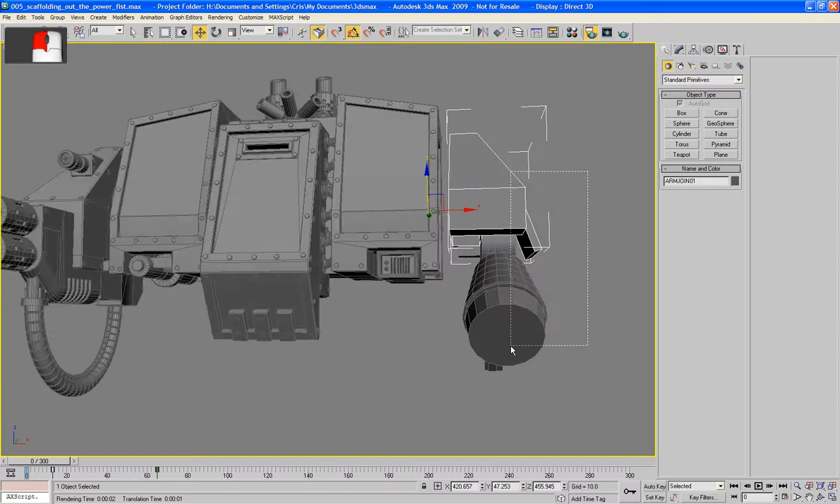So we built the simple kind of skeleton we needed for this. We've gone and I've drawn out the logistical steps we're going to need and the parts we're going to need to make it actually work.

So what I'm going to do is isolate this off now, make it its own layer. I'm going to call this the power fist arm. Put L so we know which one it is. Okay, and we'll hide everything else that isn't this power fist arm. I need to move these things into it. There, now just the power fist arm is visible, which will make things a little bit easier for us.

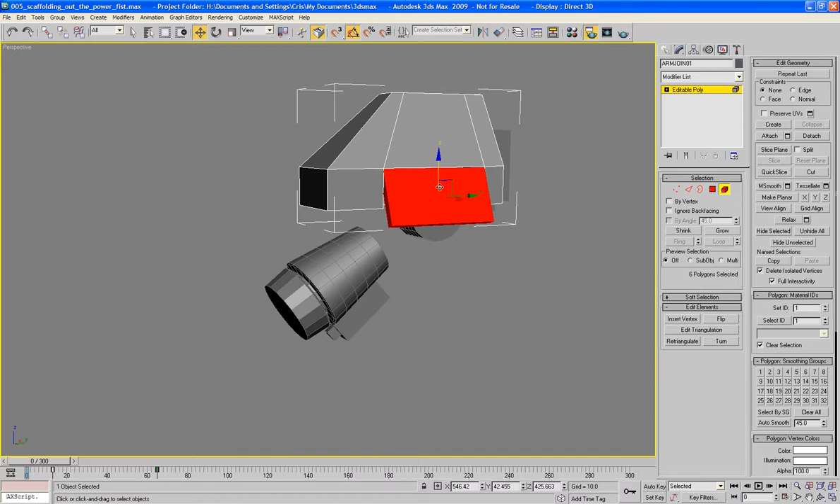Okay, first things first, let's look at this. I'm going to strip out this piece, and I've got this piece here that I can start working on as a base. Okay, now I'm just going to get out my sketching. And remember, my sketching was very rough.

What I need to do first is start building the very simple shapes that I'm going to use for this. And the thing I like about this is that I've actually got quite a good design, I think, for my main actual kind of pivot area.

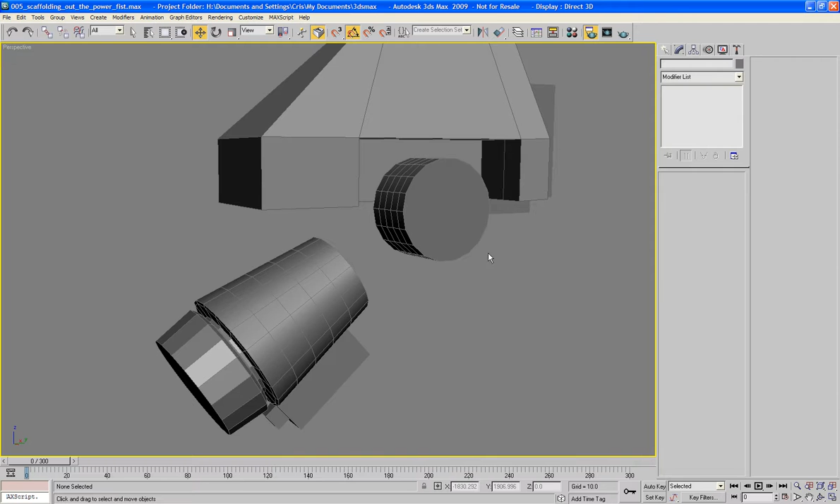So what I'm going to do is obviously ignore this cylinder because it's only been designed simply as a piece of scaffolding, and I'm going to make an auto grid, make it 24 sides. I'm just going to pull it out roughly from the middle of this, give it minimal height.

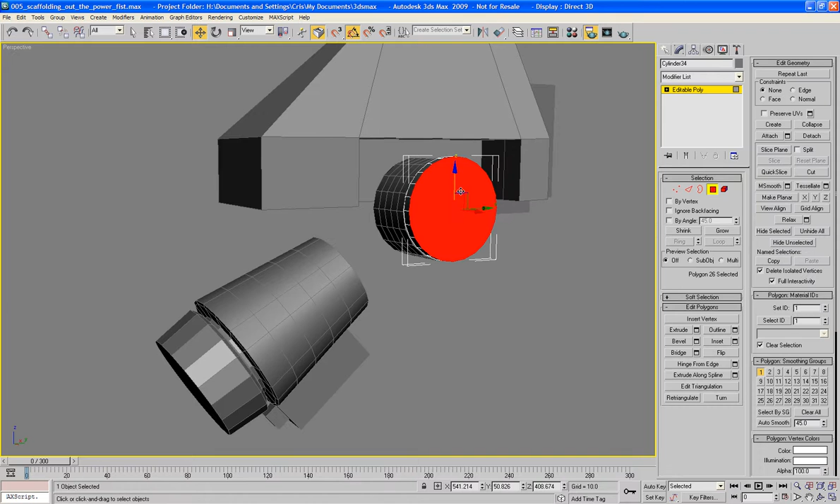There we go. Convert to editable poly. Now I like working just with the front polygon, so I'll delete the back ones, which is obviously I just selected the front one, did a Control and I, as you saw up in the top left viewport. And now I can move this kind of back to about here. That's roughly where I want it. And this gives me a shape to work on.

Now I'm just kind of looking over the shape that I've got here, and I want to start with the middle piece of this. So I'm going to go straight into bevel. Now, freehand beveling, as you know, is lots of fun. You can do lots of things with freehand beveling that you can't really do without taking a lot of time with a lot of sliders otherwise, so it's worth taking your time practicing freehand beveling.

Now I'm going to give it a 0 height. You can tell it's 0 height because it basically does that weird thing around the edges, and bring it all the way in like this to about here. This is where I'm going to start the actual inside piston mount for this. Now what I need to do is just bring this out just a tiny bit, just to create that little chamfered area there.

I'm going to bring this up, like so. A bit more. Because we need enough space to have the pistons come off the top of this as well.

Now I'm going to build the inside part of this. There we go, bring that to about there. And this will give it basically a kind of impression of heavy weight to it. Lots of nice, thick, detailed parts like this.

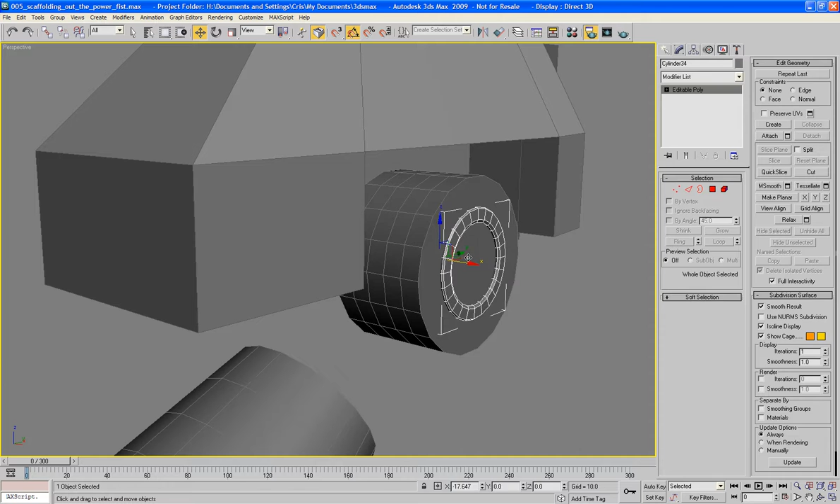Okay, that's fine. Now what I'm going to do is delete this ring here. I can just hit the delete key for that. And I'm just going to mount this into here, like so for the moment. Get rid of my scaffold. And this will allow me now to do some work on this piece.

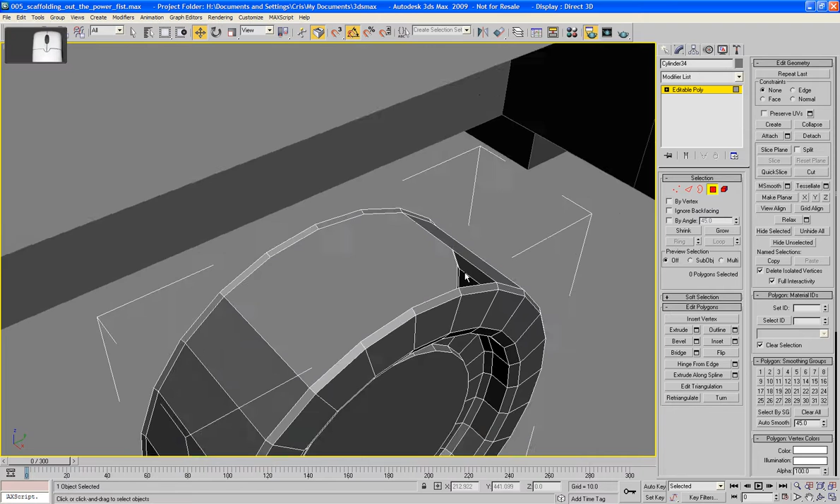What I'm going to do here, because I can cut this in half later on, I only need to do the top half at the moment. I'm going to select these 4, just here, and I'm going to delete them. Next I'm going to grab here to here, and do a bridge. And then it's just a case of grabbing here and here, doing a cap.

In fact, I probably don't even need that cap, but I'll come back to that in a moment. It's easier keeping it there for the moment, I think, until I do some changes over this side.

Okay, next I'm going to do a quick inset just here. Just wait for autosave to do its thing. There we go. And I'm going to cut here to here. Just do a quick connect. Okay, now just a case of a quick extrude straight up, like so.

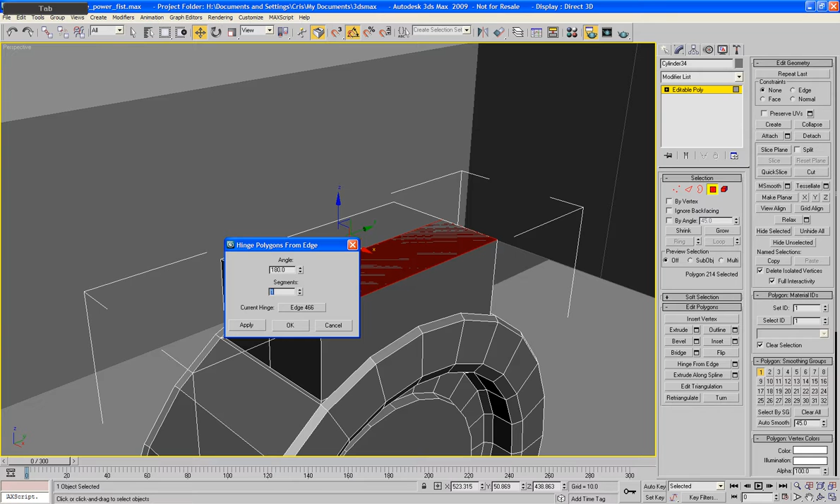And then what I want to do is go to this polygon here and do a hinge edge on this one. Pick hinge, it's going to be this. 180 degrees. And if that's 24 segments, then we're going to have 12 segments here. Click OK, click delete, Control A, go into weld.

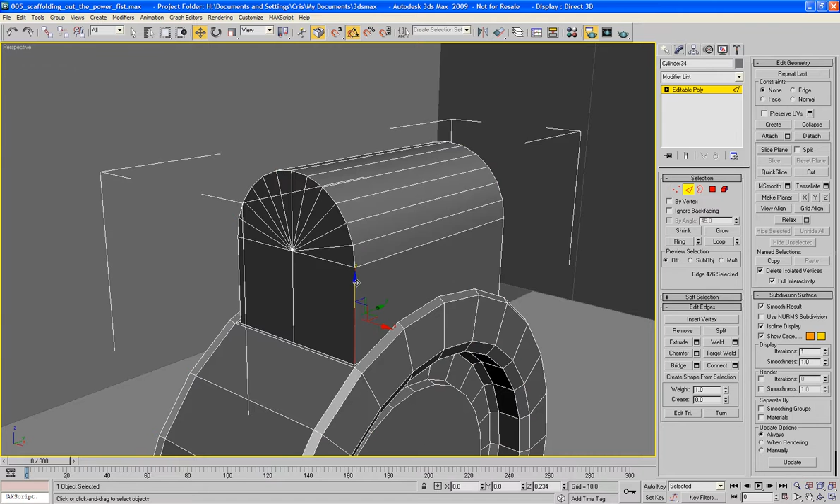Now our settings for weld may be what we had them at earlier, so I'm just going to be careful. They're not. Just make sure this is welded together, and it is, so that's fine. Okay, so we've got this top part coming over and out like that, which is ideal for what I want.

Now, because I quite like most of these shapes and the way they're coming through, I'm just going to have a look and see if there's anything else I can do with this.

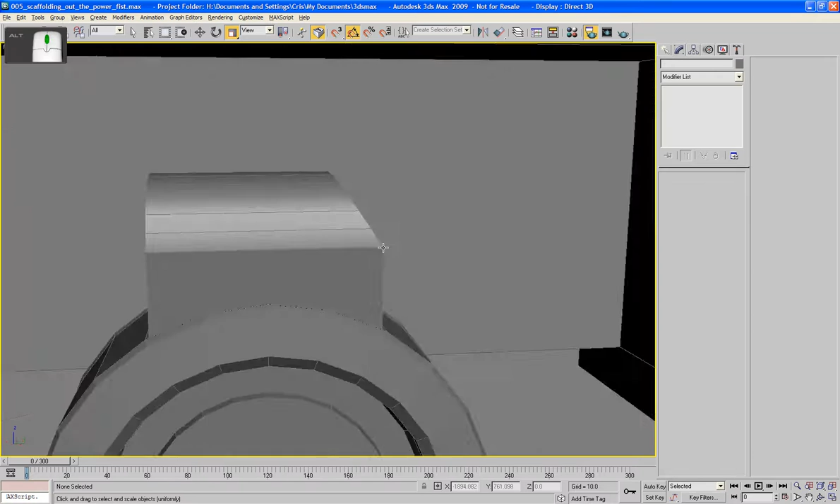And my left viewport here. What I'm going to do is grab these and just turn them over, about this far. That gives us a slightly more interesting shape. Now you may notice they're all crushed up and no use at the moment, so we'll just use the scale tool on them to make them the right size again. There we go. Drop back in perspective. That's nice, and that'll chamfer nicely as well.

Okay, next what I need to do is kind of half this. So I'll just get my select by polygon tool, take half of it out, like so. Then I can just use my rotate tool, hold down... well, I can't hold down shift to do this really, because it'll be back to front if I do, so it's going to have to be a mirror.

Just make sure I've got it on the correct axis, which is the Z. Click OK. Now, of course, I've got to reset the X-form on this straight away, which will turn it inside out. But I can turn it the right way around again just by convert to editable poly, select by element, and then flip.

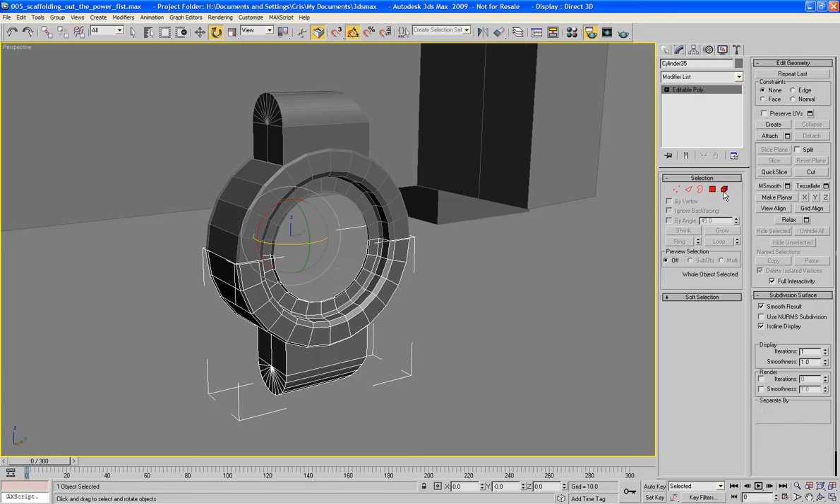Okay, let's attach the two parts together. Quick Control A and a weld. And make sure our verts start getting attached together again properly. There we go. So that's starting to work out okay.

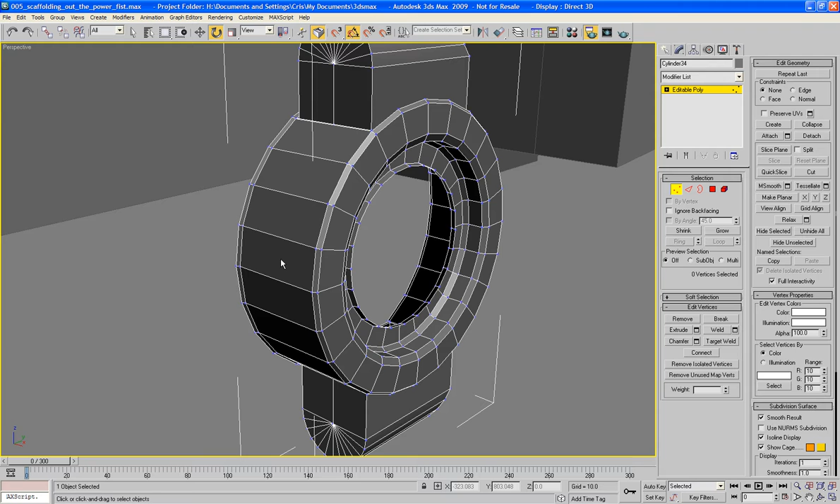Now we need a large central kind of area that we can have our main control piston come off. I mean, these may well be just redundant, but that's not the point, we still need to have the detail there. So what I'm going to do is select these 2 polygons here, and I'm going to delete those.

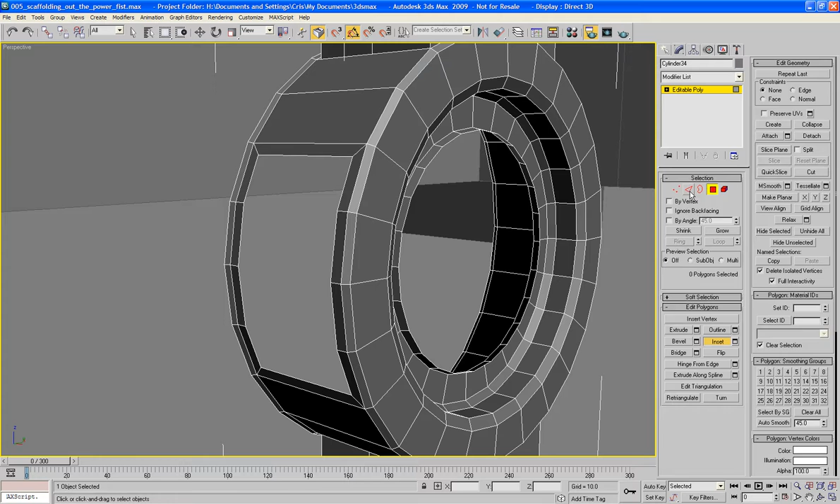Actually, before I do, I'll inset them a little bit. There we go. Now I'll delete them. That way I've got a slightly thicker edge, which makes it look stronger. Then bridge, and I'm going to cap there.

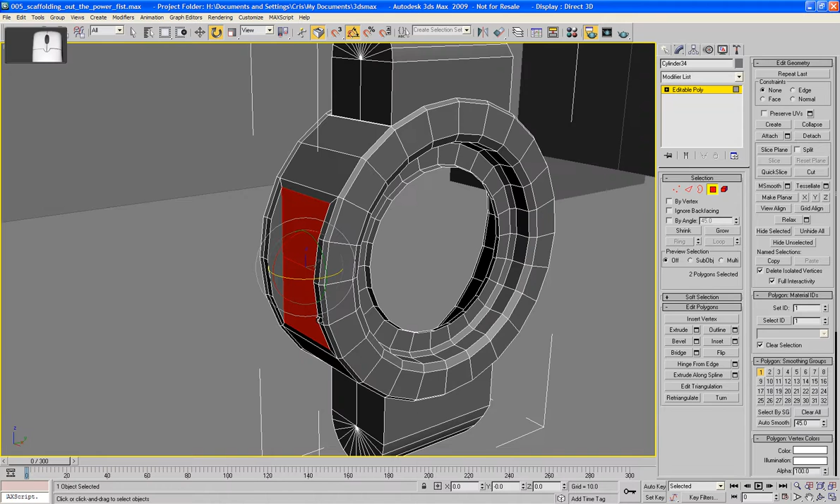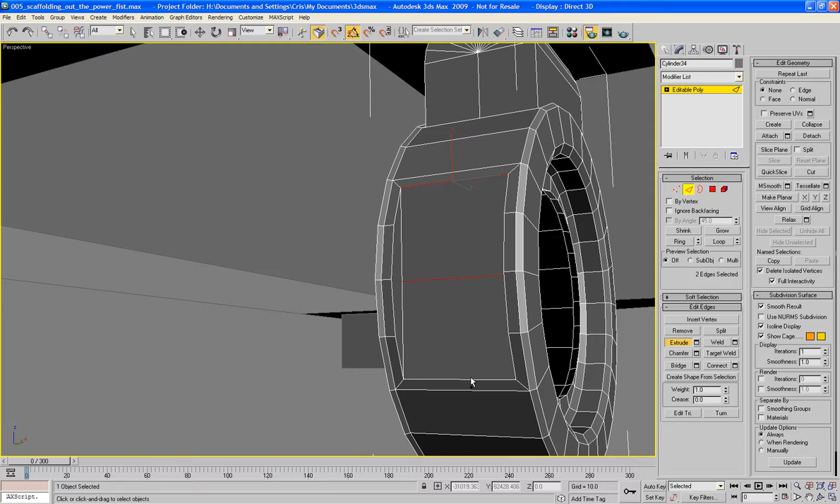And then here to here, quick connect. And then I'm going to just extrude this straight out. Now I don't need it that thick, so that's a little bit too thick for me, but that's okay, I can make it smaller. So I only want half the size. I'll just go straight down and do a connect. And then just extrude it straight out, like so.

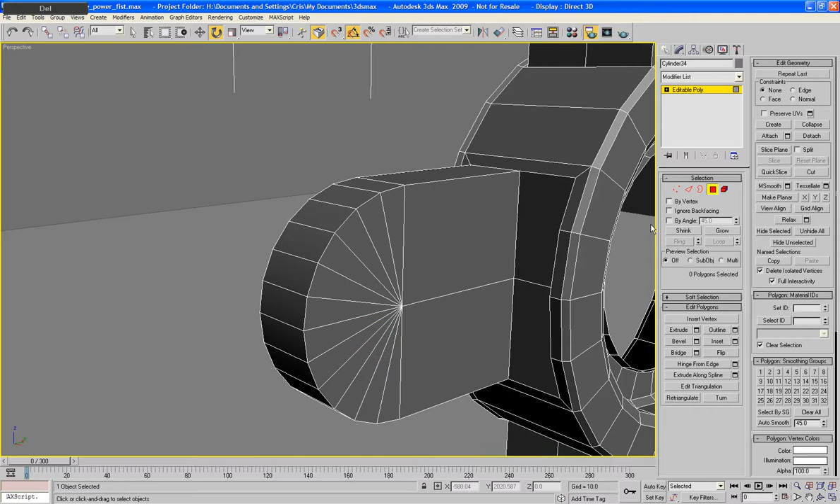Delete this bottom piece, then do a hinge from edge on here. Same settings as before, so I just click OK, delete that piece. Control A, do a quick weld just to close it. Okay, and now we've got a piece that I can basically build our short, fat, stubby piston off straight away. And that gives us a secondary kind of movement off the elbow that we don't need, but which we're having anyway.

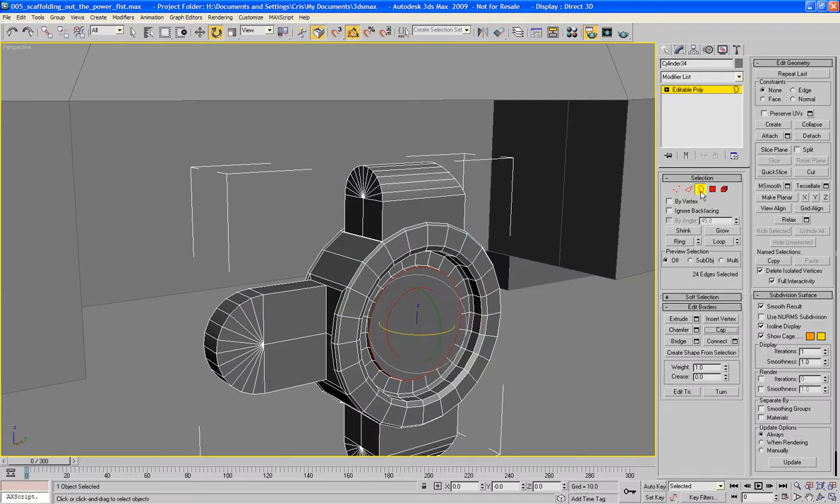Okay, let's cap this middle part again, like so. And I'm just going to isolate this and look at the back here. Now the reason I didn't remove some of these pieces is because I need this round shape for the moment. I'm able to keep it anyway. I'm going to cap that.

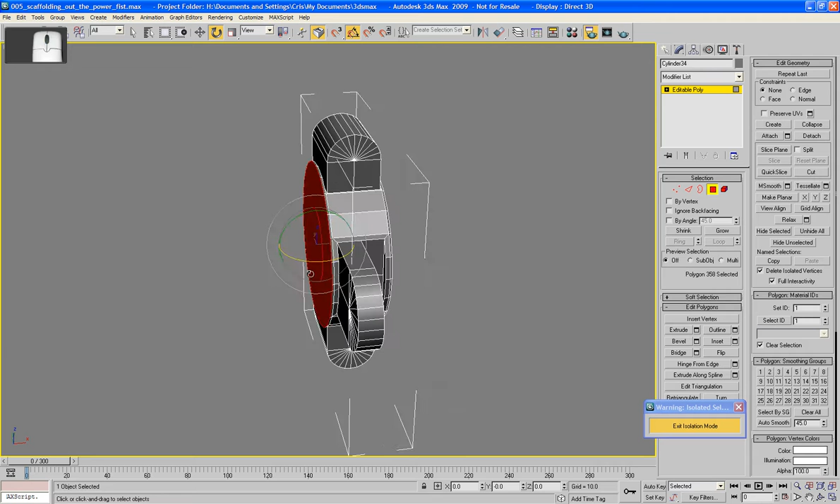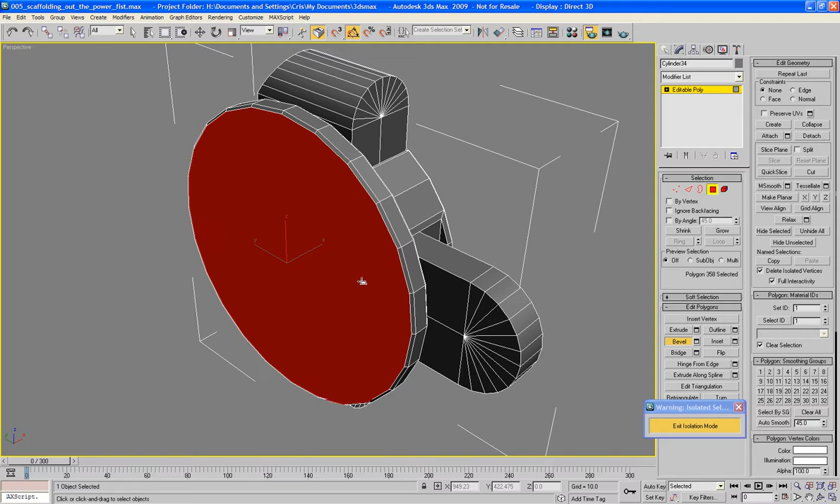And if you remember, I said that we needed to build our larger disc that kind of goes behind this. So what I'm going to do is give it a 0 length bevel, bring it straight out to about there. Then slight chamfer, bring it out like that. Slight inward chamfer, and then into about there. Okay, and this gives us basically this nice big fat control ring, which is like a big gear.

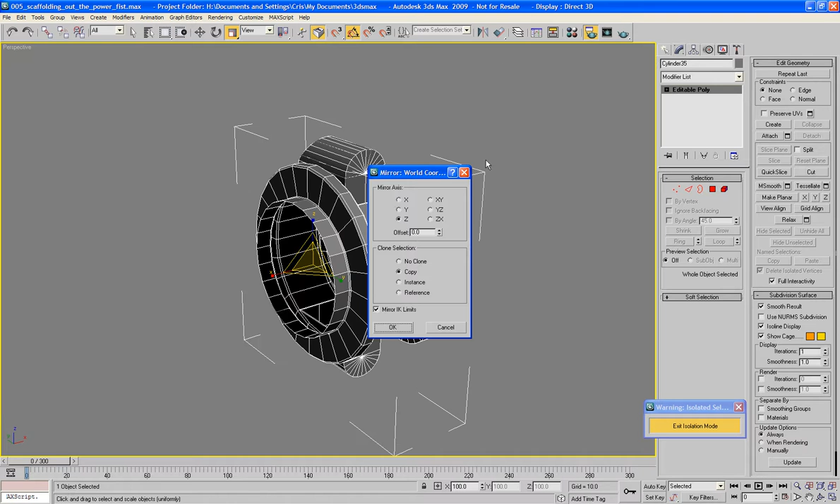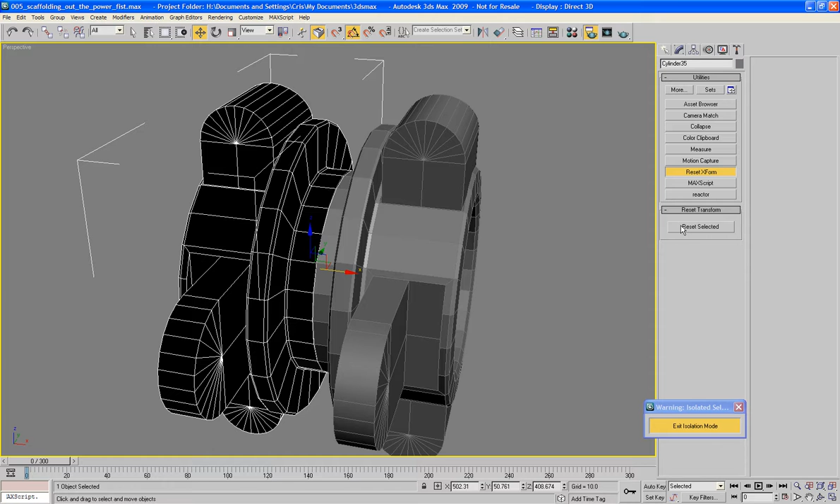Now if I delete this inside part here, what I can do now is create a mirror again, this time on the z-axis, which I'll move across, like so. Funny, you probably hear me kind of leaning forward and leaning back and stuff. Okay, again, same as before, we need to reset the X-form. And then flip that over.

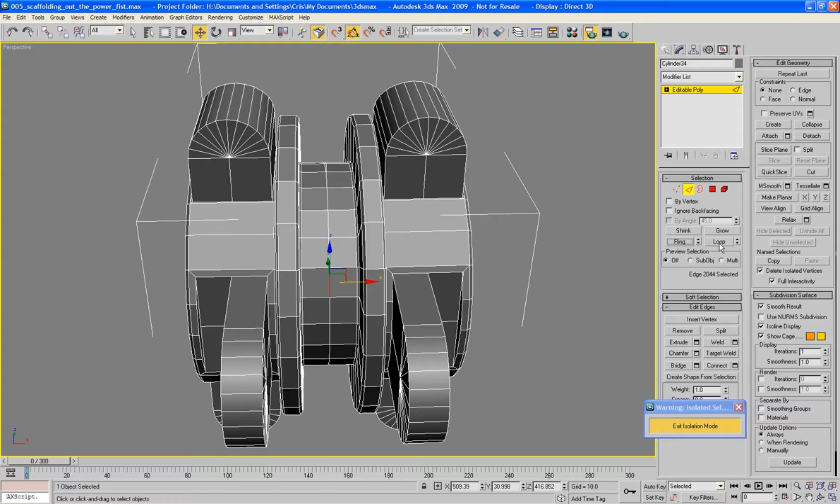There we are. Now it's just a case of attaching the two, then a quick weld. Then if I just grab here and do a quick loop, or ring rather - no, hang on, loop, always get them mixed up. Backspace. Looks like we've got a slight disparity in its shape there. That's okay, you can work with that. Backspace.

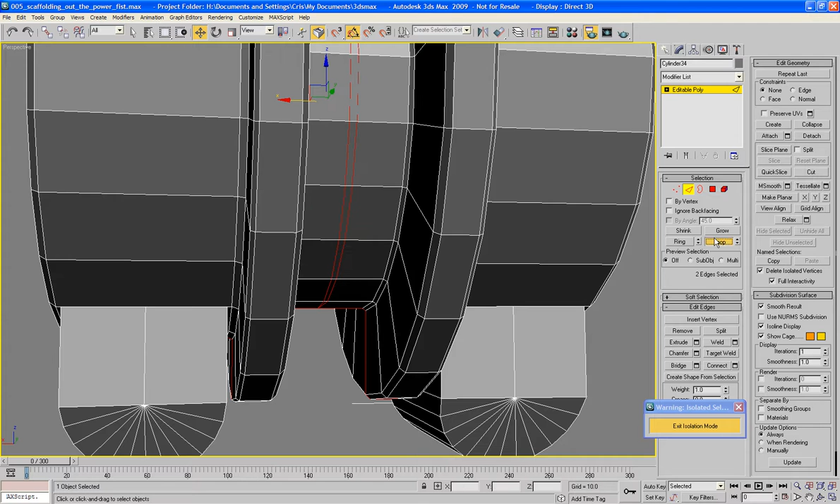Let's just undo this a moment. Go to my top viewport. Looks like the angle is off. Let's flip that again. And the last thing I want is an angle that is off, to be quite honest. So let's make it an angle slightly better. Let's hit F3 so I can see what I'm doing.

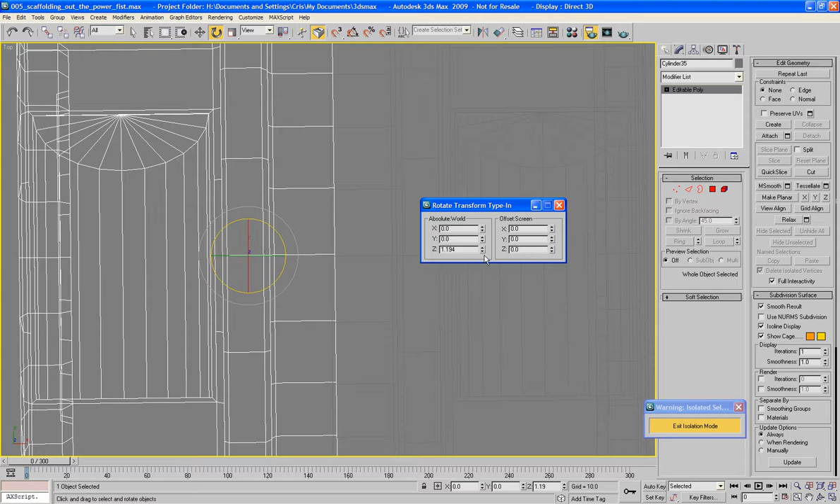This is always one of the problems because, of course, when I created and was building on the grid, it must have been slightly offset. So the angle wasn't completely perfect, but it is something that we can fix, so I wouldn't get too worried.

Okay, I'm just going to use the move tool, move it to about there. That's fine. And then it's a case of attaching them and doing some welding. Now let's see if we can get rid of this middle seam.

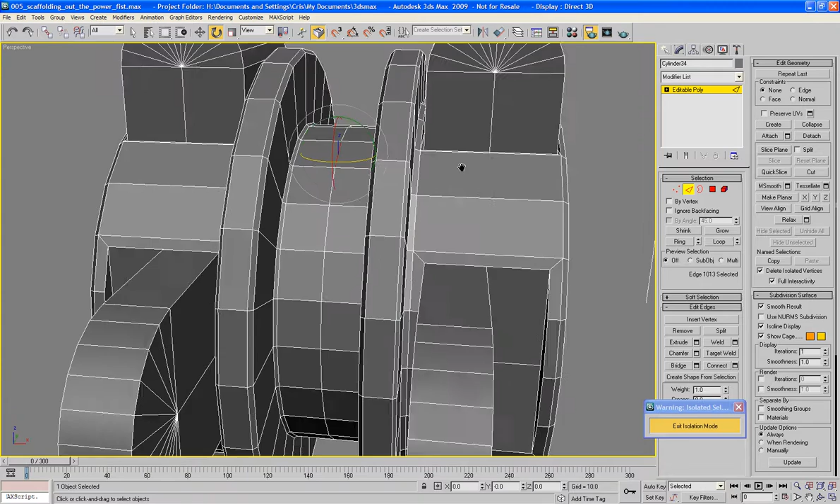Sure, looks that way. Backspace, top view and zoom. There'll be a load of verts just left down the middle here, which I want to kill. Backspace those as well. Perspective zoom. There. And that is our elbow piece.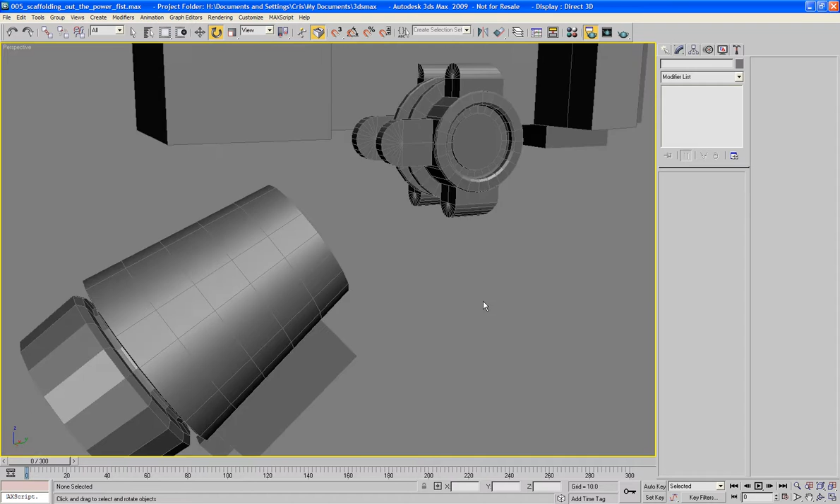Now obviously it's not been built in the correct angle to how it's going to be used. However, it's okay. As you can see, it also fits inside this, which is a very important consideration for me. So next part, we're going to create probably the pistons and then the mounts down here.